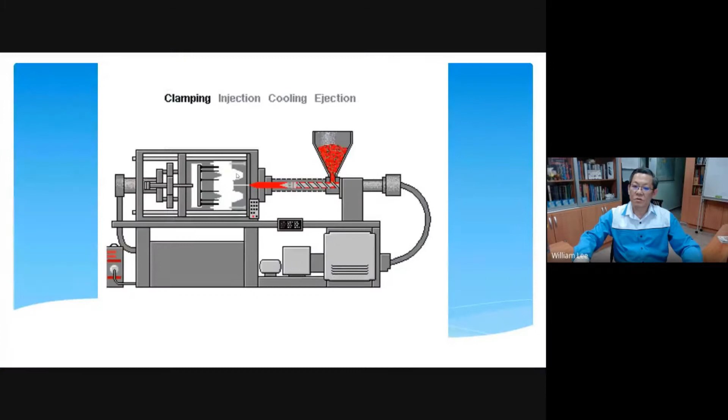I'm sorry about it, because the simulation is supposed to move, and I apologize for that. I don't know what happened, why it doesn't move. Let's hang on a second, perhaps I need to restart my slide again. Just hang on. Hello? Yeah.

Hello, yes, okay. So here you can see there are 4 phases: clamping, followed by injection, then cooling, and then ejection. So as you can see from this injection molding process, the first is clamping. What happens in clamping is the 2 mold halves approach each other. During the injection phase, the plastic pumps in to fill up the cavity. Then the mold undergoes cooling. After that, the parts will be removed by opening the mold. I will explain each of these 4 phases of the injection molding process.

During the clamping phase, you can see the mold is divided into 2 halves. On your right hand side, this is called the fixed half. The fixed half means this mold is attached to the injection side, nearer to the nozzle and the barrel. Whereas on the other half, this is called the movable half. Some people call this the B half, or also know it as the core side.

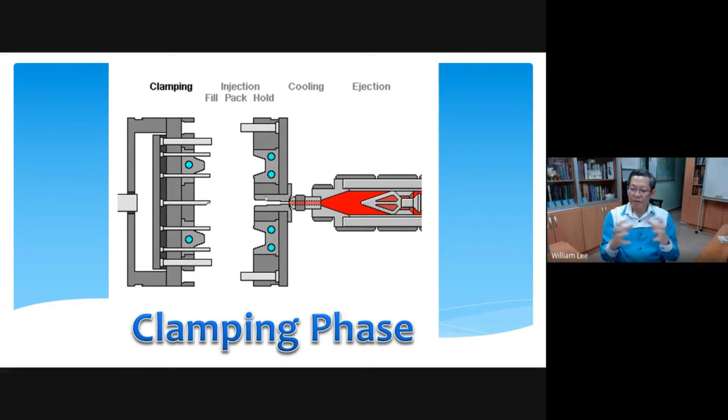The clamping phase is when the mold is closed, then the machine has to build up this clamping force. Clamping force is trying to close the mold, whereas the injection force is trying to open the mold. Initially the mold is empty, so there's no pressure inside, only atmospheric pressure because it's filled with air.

So when you pump in the plastic during the injection phase, you're trying to open up this mold because you build up the internal pressure. Therefore, clamping must build up the force to close the mold. Otherwise, the plastic might zip out, giving you extra material. We call this flashing.

So next is the injection phase. Under the injection phase, you have 3 functions here. Now, of course, you may not have the notes with you, but I want you to write down some keywords because later I'm going to throw you some quiz, and I want to test whether you paid attention or not. So under injection, you have 3 functions here.

One is to fill. Initially the mold is filled up by the plastic. Preferably, we don't want to fill it fully, so you can see we still have some gap. We just fill up loosely. The reason is we want to allow some room space, because that room space is important for the plastic to move during the second function, which is called packing.

The purpose of packing is to fill up the unfilled area from the first function, and another purpose of packing is to compensate for the shrinkage of the plastic. Because right now the plastic is under molten condition, and when it solidifies, it will shrink. So you need to pack to compensate for this shrinkage.

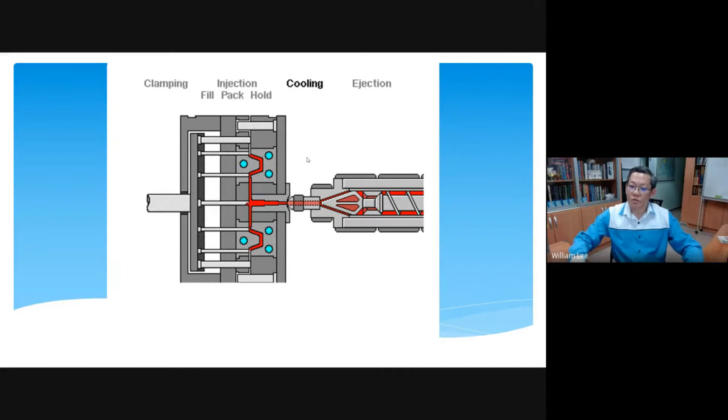Yes, everything okay. Okay, so now we come to the third phase here, and this is the cooling phase. Here you can see what happened is that during the cooling, this indicates a water line. For cooling you can use either water or oil, depending on what temperature you want to apply to your mold.

Okay, so during the cooling phase, it seems nothing happened in the mold system, right?

Remember the screw can move in two motions. One is linear motion, meaning the screw moves backward and forward, providing push to your plastic. At the same time, when it retracts back, the screw will rotate. When it rotates, it builds up another shot ready for the next cycle. We call this plastication, or plasticization.

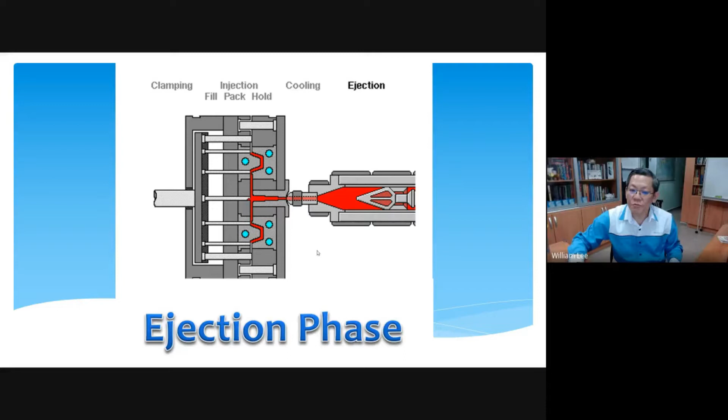Now we enter the ejection phase. Under this phase, the mold will open. When it opens, the parts will be removed and knocked out. I do not know why the simulation doesn't work, let me fix this... okay, ejection phase, now it works, you can see.

So the two mold halves will be separated. Initially, during opening, the mold can move fast, but then later it will slow down. Some people try to improve productivity by adjusting this speed to save a few seconds per cycle. Even if you save just 0.01 seconds per cycle, imagine over 1 million shots, you actually save a lot of time. This is to optimize the molding process.

So notice, after cooling, then you come to ejection. Here you can see the screw has retracted back, building up the next shot, ready for the next cycle. The process keeps repeating, and after these 4 phases, you complete one molding cycle.

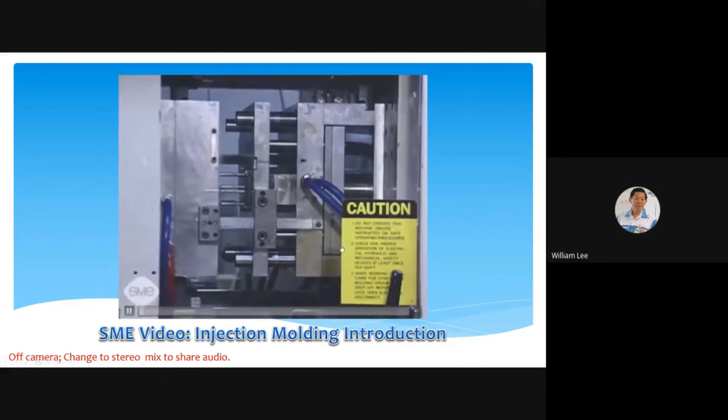Injection molding is the most common method of producing parts out of plastic material. The process involves injecting molten plastic at high pressure into a mold shaped in the form of a part. Once this plastic cools and solidifies, the mold opens and the part is ejected.

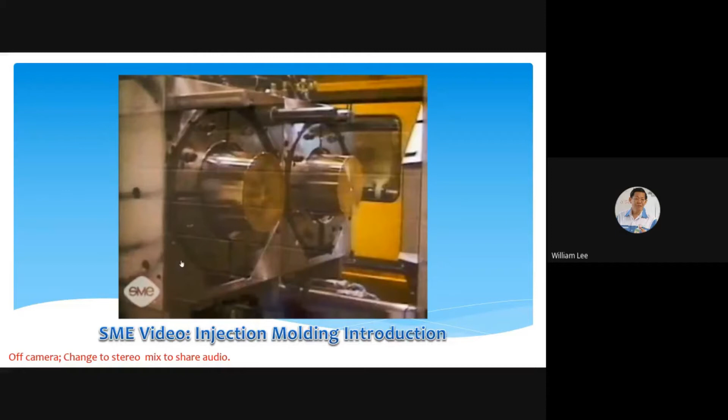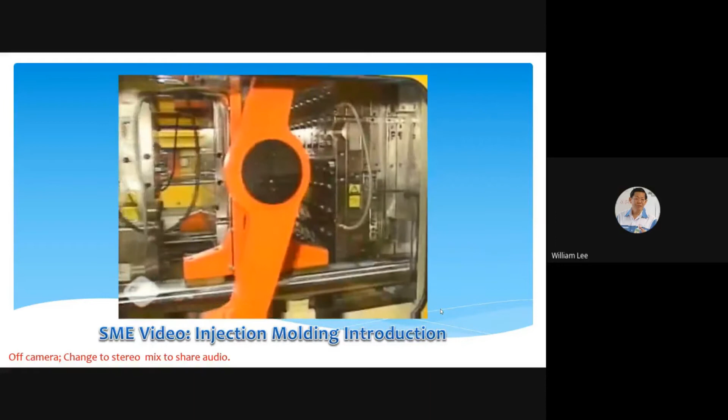Injection molding is an extremely versatile process that can produce parts with holes, springs, threads, hinges, and undercuts in a single operation. Injection molded parts can be simple or complex, and can be solid, foamed, reinforced, or filled. They can be small or large, thick or thin, flexible or rigid. Injection molded parts also lend themselves to endless decorative effects. They can be polished, textured, hot stamped, plated, colored, or clear. No other manufacturing process offers the range of capabilities injection molding provides.

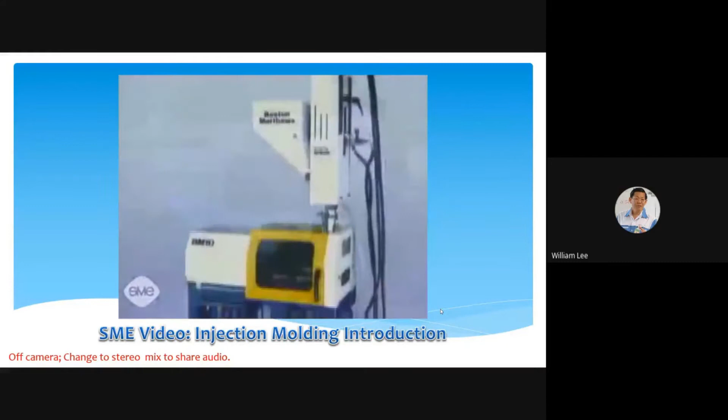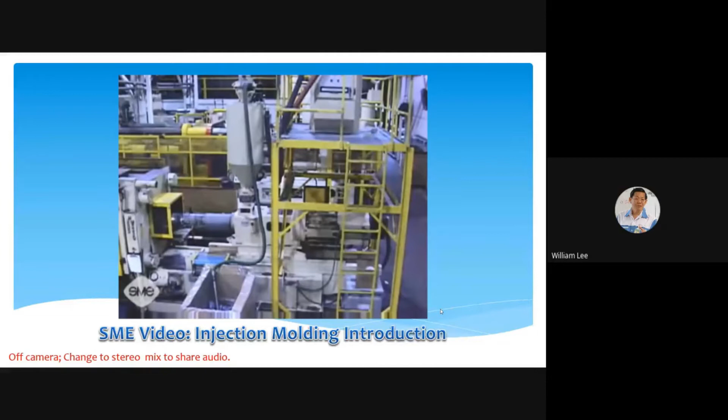Injection molding machines range in size and complexity from desk-size units up to machines the size of a small house. All injection molding machines are a combination of two systems: an injection system and a clamping system. The injection system heats the thermoplastic material to its appropriate viscosity or flowability and then forcefully injects it into the mold. There are two types of injection mechanisms: the reciprocating screw, which is the most common, and the two-stage screw. The main parts of the reciprocating screw injection system are the hopper, a reciprocating screw inside an externally heated injection barrel, a hydraulic motor, and an injection cylinder.

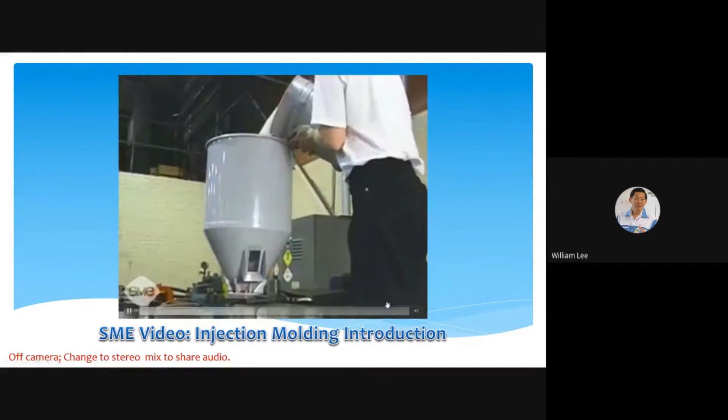Resin material is fed to the injection barrel from the hopper. These hoppers may be filled manually or vacuum-fed automatically, and often have dryers attached to the top to remove moisture from the material. As the resin enters the injection barrel, it is driven forward by the rotation of the screw, which is powered by the hydraulic motor. The resin plasticizes, or melts, as the turning screw drags it towards the nozzle end. This is referred to as drag flow. Drag flow causes the polymer molecules to slide over each other, creating frictional heat, which melts the material.

External heating bands provide additional heat to the injection barrel. They bring the material to its final temperature and compensate for radiation heat loss. The temperature is controlled by 3 thermocouples in the barrel and 1 in the nozzle.

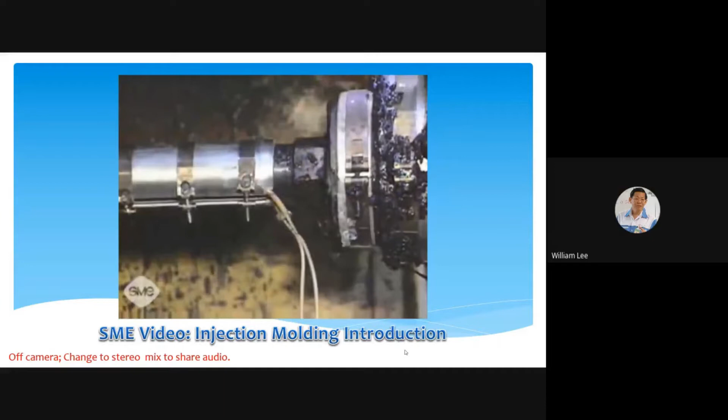The screw consists of 3 zones. The first zone, half of the screw, is called the feed zone. It has a constant flight depth, which forces the material together and rids it of air. The second zone, called the melt zone, has a decreasing flight depth, which reduces the plastic volume, causing the plastic molecules to rub harder against each other, plasticizing the material.

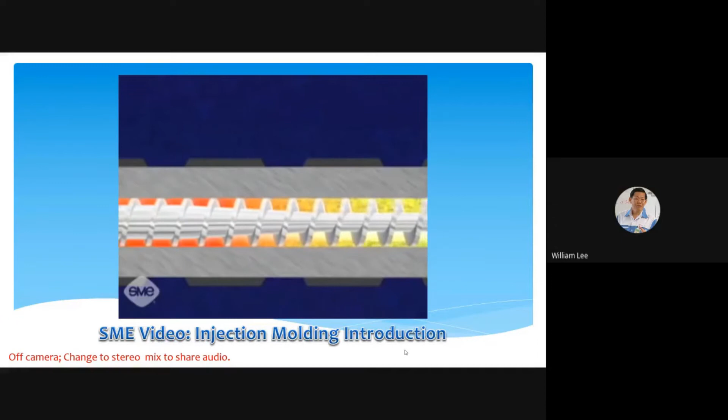The melt zone leads to the third, or metering zone. The metering zone has a constant flight depth much smaller than that of the feed zone. This section acts as a pump. The tip of the screw has a one-way valve which lets material flow only towards the nozzle end.

The force of the plasticized material pushes the screw back as it turns, building a chamber of plastic in front of the screw. When enough material for the injection shot is melted, the screw stops and pulls back to decompress.

For injecting the material, the one-way valve closes as the screw is hydraulically pushed forward by the injection cylinder. This sends the molten material through the injection unit's nozzle and into the injection mold.

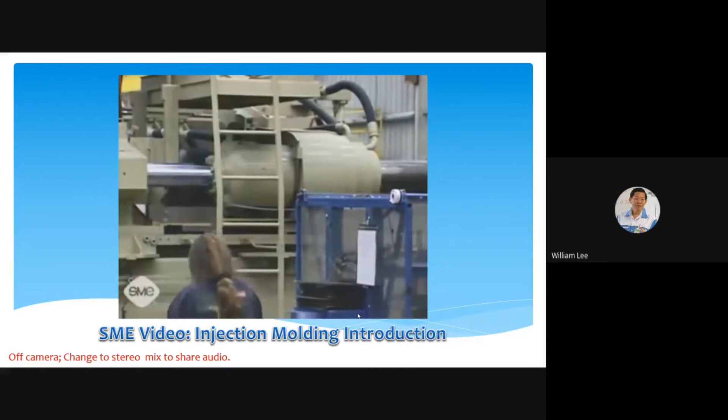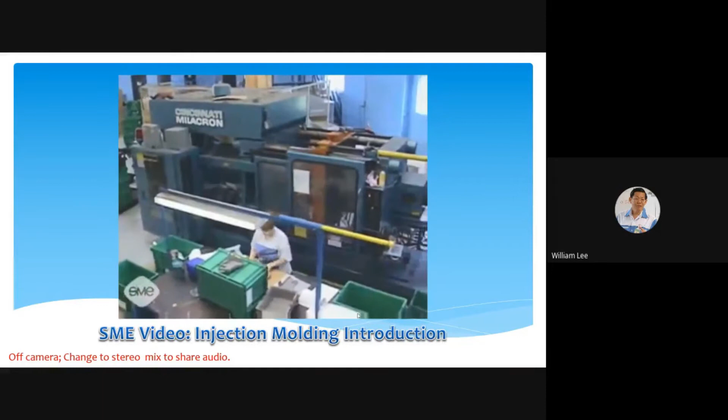At the time of injection, the material's temperature ranges from approximately 320 to 600 degrees Fahrenheit, or 160 to 320 degrees Celsius. Once the plastic solidifies, no more pressure can be exerted upon it in the mold. The reciprocating screw then begins to rotate again, melting material for the next shot.

Okay, let me turn back to my video, my camera, and also my microphone.

I hope that you have enjoyed the show just now, and that it explained to you the overall view of the injection molding cycle and how the injection system works, and how this mold is operating inside the machine.

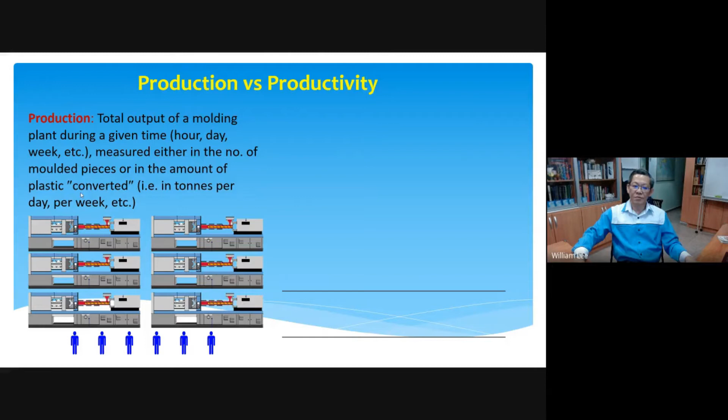For example, from this plant here you can produce 3,000 parts per 8-hour shift. Let's say one shift you run 8 hours. If you're running non-stop for 24 hours, meaning you just times 3, you get 9,000 parts per day. If you base it on per shift of 8 hours, you produce 3,000 parts.

Okay, and what about productivity? Productivity is defined as the total output of a molding plant per floor area and the number of operators required. As a rule, the better the machine you use, the molds, the methods you use to operate the plant as a whole, and if you use fewer operators, the higher is called the

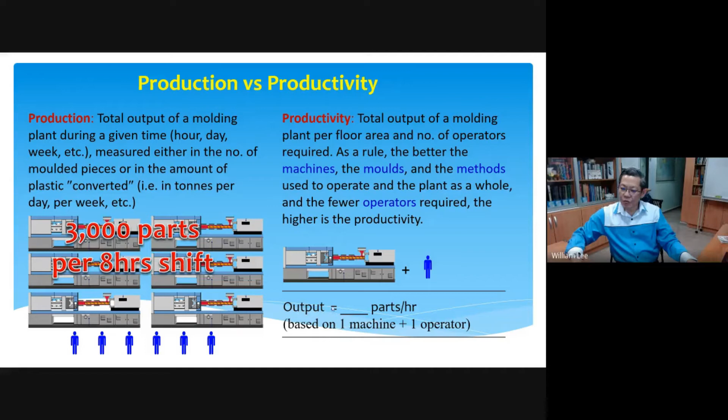productivity. So for example, here you have one machine, one operator, and here we say the output is, let's say, 120 parts per hour. So that means based on one machine, one operator, you can produce 120 parts.

Now here, if you compare the productivity from this plant here, obviously you have to compare fairly. So here you have 6 machines, 6 operators. Here I only have 1 machine, 1 operator. So how do you convert? If you base it on 1 machine, 1 operator, how many parts per hour? I want you to type in again, try to work it out. If you have found the answer, type in the answer.

So what is the productivity from this plant here? How do you work out? Remember, based on 1 machine, 1 operator, we have to compare them equally. You know that you have 6 machines here, 6 pairs actually, 1 machine, 1 operator, you have 6 pairs. Here only I have 1 pair, okay?

Yes, we have Huang coming in and Hao coming in, 62.5 parts per hour. How do you get 62.5 parts? It's 3,000 divided by 6 first, okay? 3,000 divided by 6, and then divided by 8 hours, because here I'm asking about the unit, that's correct.

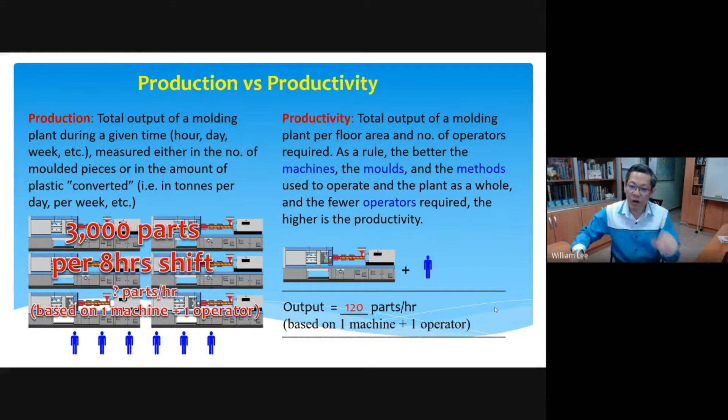So let me show you one example here. Again, this is plant A. I have 4 machines and you're using 4 single cavity. Single cavity means that every 1 shot, you only produce 1 part. And then you have 4 operators. In this case, I rated here based on the earlier output, 120 parts per hour per operator.

So therefore, in this case, the output, now we have 4 machines, 4 pairs already. So therefore, based on 120 parts, 120 times 4, you got 480 parts per hour.

Do you know how to work out? If you already know the unit here, 120 parts from the earlier slide, so I have 4 pairs here, right? So 1 pair contributes 120 parts per hour. So you have 4 persons here, 4 machines, 4 more, so I have 480. Okay, so I hope you understand how to work out.

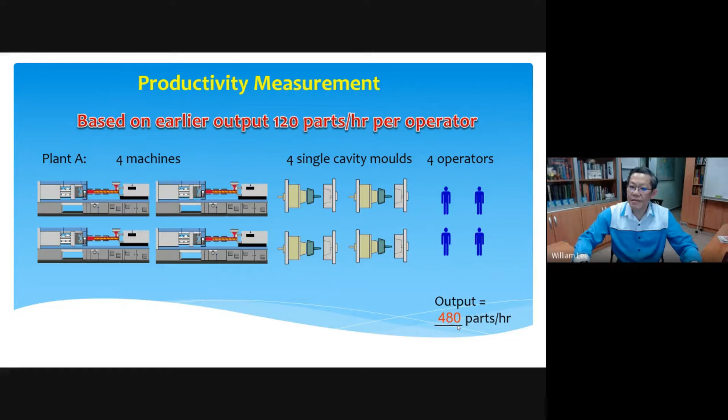Now I compare with another plant B here. Here I have 1 machine only, and I have 4 cavity mold. 4 cavity here, you can see 1, 2, 3, 4. 4 cavity mold meaning that every 1 cycle, then you can make 4 parts. And here I engage 0 operators because I use a fully automatic with the help from the robot here. Let's say if the output is still the same, but I'm only using 1 machine and there's no operator and only 1 mold.

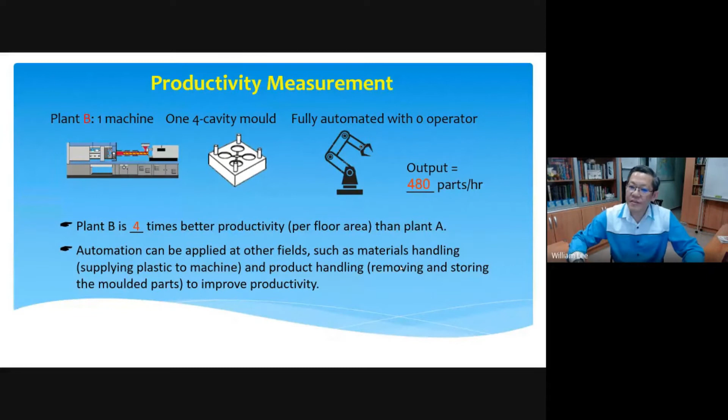All right, next I want to show you another example here. Now that you know the productivity from the earlier example, is plant B, where you can achieve 4 times better than plant A. So assuming here the time allocated for mold is 40 hours. That means from one machine, I give you 40 hours to run this order. So when you want to install the mold, let's say it takes 6 hours.

And installation includes, first you have to mount the mold in the machine, then you connect all the pipelines, and then you heat up the mold. So you have to warm it, and then you run it. After you run a few shots, warm up, then you can run it on the full cycle fully automatically. And this also includes dismantle. After you finish the order, you still need to take out, so you need to also disconnect and remove the mold and get the machine ready.

So these are all included under this 6 hours here. That means to install and to unload, it takes 6 hours. So that means the total hours allocated is only 40 hours, and 6 hours is actually non-productive. So therefore, assuming that all pieces are good, no rejects acceptable, how do you calculate the efficiency?

So here you can see 40 hours minus 6 hours over 40 hours. This is a total allocated time, and you have wasted 6 hours for the non-productive activity. So 40 minus 6 divided by 40 hours, times 100 if you want to convert into percentage. Can someone work out for me? What is this? 85, yep very good. Nicholas, very fast, 85% efficiency here.

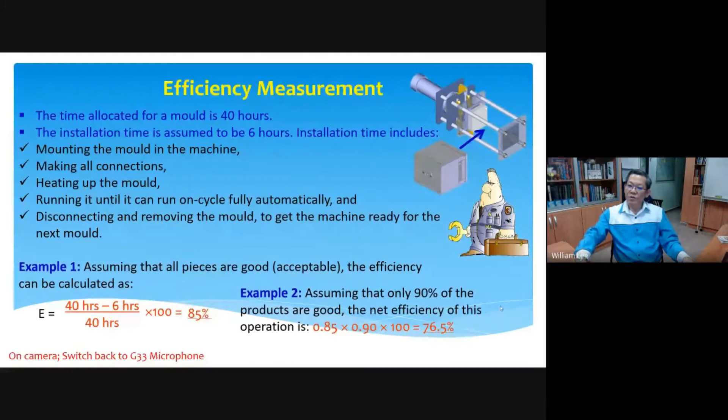76.5% efficiency. So again, efficiency can also help to improve productivity. How? By reducing the reject. If you have more reject, that means you end up with a lower value from 90%. Let's say if you have 30% reject, you only have 70%. So multiplying with the lower value, you will end up with an even lower percentage of efficiency. So another way for you to help the employer is to reduce the reject. But then you have to understand what caused the reject. You still need to go back to the basics to solve the problem.

So you know that the bosses don't want to waste their money, right? When they invest in you, they would like to ask from you - what are they looking at from this fresh graduate? And what can you offer to the new bosses? So here I have listed 3 skill sets, and I would like you to check which skill set in terms of priority is important for you to secure an employment opportunity. Will it be personal skill, working experience, or education qualification?

This is my second quiz. I've given you this second quiz here where you need to find out - don't treat it as a test, don't worry, it's just a survey only. I want you to rank them - which one is more important in order of priority? For example, 1 means this is more important, second important, or third important. So I have 3 skill sets here, and I'll give you the 1, 2, 3, 4, 5, 6 combination.

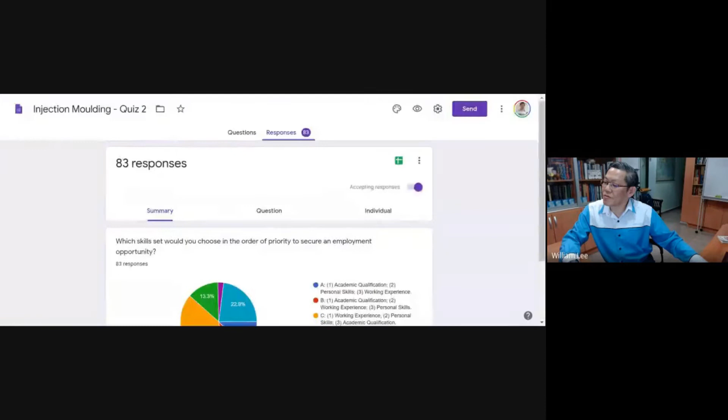So now it's between C and F. Look at the trend now - it seems like a lot of people prefer C. So majority of you prefer C, and some believe the second one is B. Okay, I can see the trend now already. So it looks like you prefer number C - work experience is ranked number 1. All right, that's fair enough.

Okay, let's go back to this again. It's very subjective. I can see that a lot of you prefer personal skill, which is ranked number 1. So you prefer F, and the second one is C, working experience.

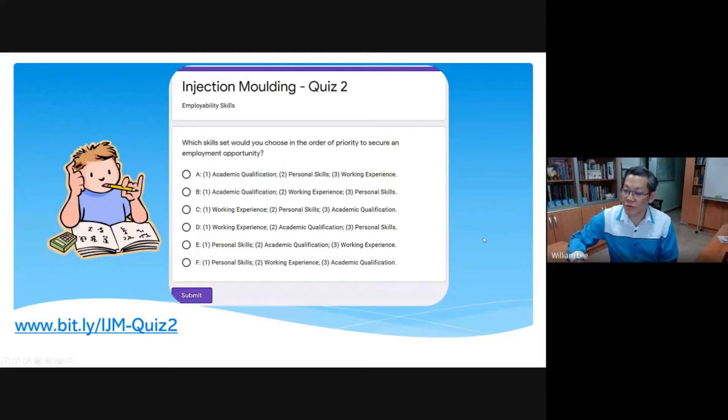Now, what I can tell you is the criteria used by today's HR practitioners when they first interview a fresh graduate - what do they care about? Don't forget that if you are comparing with those who are applying for the same job, there are a lot of people who also have the same academic qualification. But I can share with you some of my survey findings from when I deal with these people, and they told me this is the ranking. Let me check.

So this is the criteria used. First they will check your character, then they will test your communication skill—these two are under personal skill. Then they will ask about working knowledge and check whether you have job experience—this is actually checking whether you are work ready. Only the final one, they check your education qualification. This is according to some managers in the industry who told me, so this is for your reference.

Now, what I can see from this survey is what the employer will prefer. Some of you say the working knowledge can be a priority, but what if you are without the working knowledge, and what if you never worked before? Therefore the personal skill is actually ranked first, because they find that if you have the right attitude, you gain the opportunity to work and then to move on. So this is how they rank it.

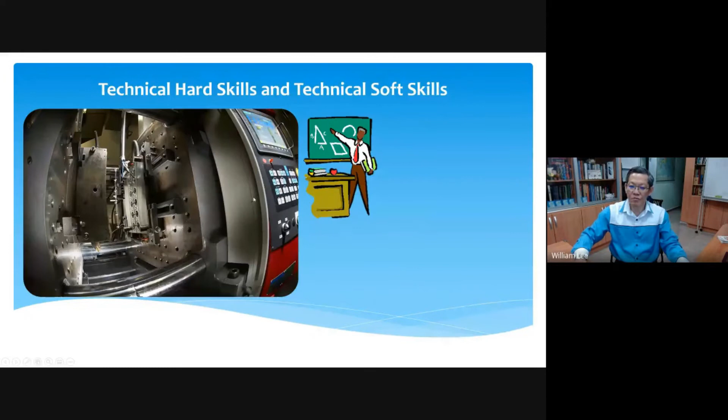In this case, it involves the use of the machine—you must know how to operate the machine, operate the mold, and maybe use some sensors for production. Also, if you have some defect, for example an unbalanced cavity fill, maybe you have to learn how to use the insert, or in the future, learn some digital skill, like how to command the robot to perform a specific task.

These are under the technical hard skill, okay? By using this machinery and tools, it allows you to start to produce some part. But this is only a shape, as I said, to produce a part. The part looks like the shape of the product. But whether this product is reliable, is durable, can last longer or not - this talks about the performance of your part.

In this case, technical soft skill is where they teach the science and insight on how to make a good part, right? So this part must achieve the specification set by the user, by the customer. And this is the difference between soft skill and hard skill.

So in short, we can say that soft skill is learning the theoretical side of this technical learning, right? Theory is, of course - some people say that learning the theory might not be applicable, but it's good to study theory. The only thing is that you have to focus. This theory must be applicable to the job that you are using. Here we teach the science and the insight.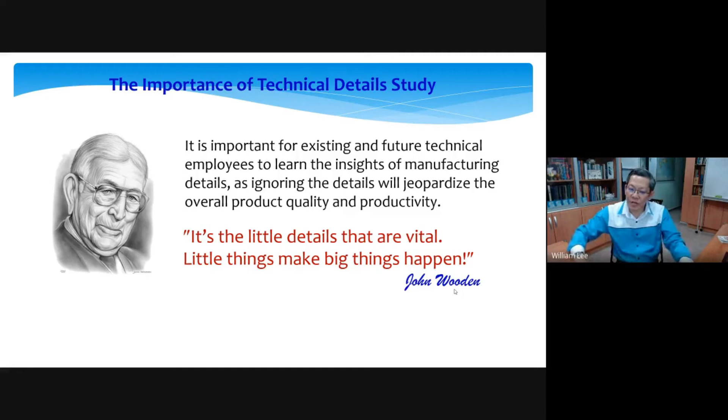Usually when you apply for a job, you may be assigned to look after a certain specific task. But I find that a lot of other people tend to ignore other factors which they feel, for example, like the details of the design, details of material, details of the mold making. They thought this is not their scope of duty, which I find is wrong, because to make a quality part depends on many manufacturing variables, which I will explain to you in a short while.

So I believe, therefore, manufacturing should be regarded as a science. It is not magic. You can see that magic means - this is our famous cartoon to depict our Raja Bomoh. And this differentiates what is the traditional worker and the scientific worker. So if manufacturing is a science, we call this scientific manufacturing. We should treat it as a science.

For scientific manufacturing, you require scientific workers, right? The difference between the two is scientific workers are always based on fact and data. They behave like a doctor. A doctor always studies the prior history, based on data. They will inspect you before they give you the solution - they give you the medical solution.

So how do you build up this knowledge? The technical soft skill is based on scientific and logical reasoning. It will be useful to complement the hard skill practice, not only by using the hard skill.

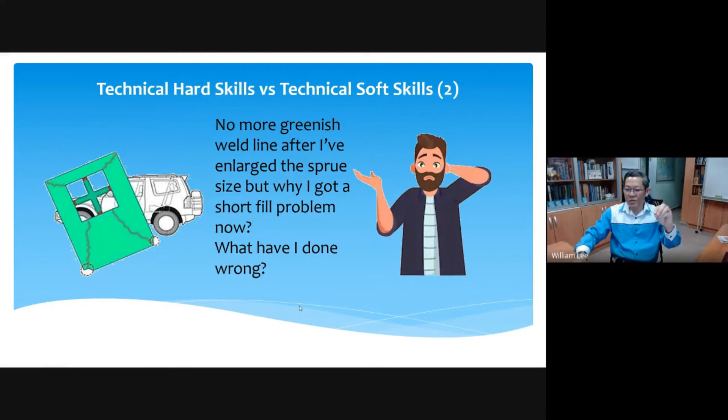Because if you fill the parts slowly, that means the temperature will cool down. When you cool down the temperature, by the time the two melt streams meet each other, you can see the visible weld line.

So that is to say, you have to again understand the inside of this process in order to choose the right parameters, to choose the right factors. Otherwise some of these results won't give you a logical reason.

So my advice is you have to work smart and not harder in order to deserve a higher pay.

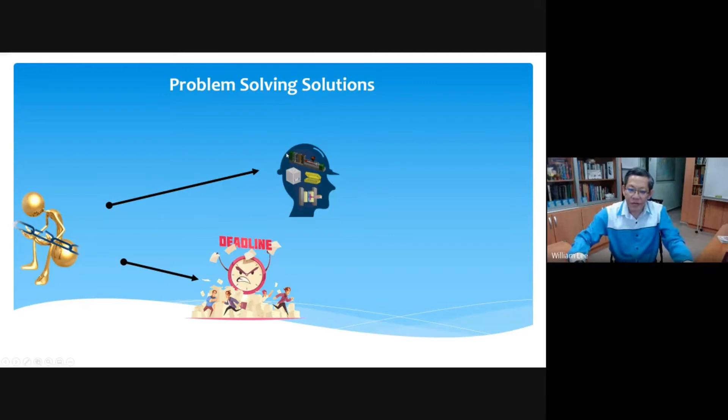When you have this problem, it relies on your skill to solve it. To me, solving the problem has two ways. One is to fix the problem, but this is just a temporary measure. To fix it means you have to do it fast.

Why do you need to do it fast? Because you have a deadline to make. This is usually what happens in the factory, in existing manufacturing. From my observation, the existing manufacturing culture is one where people always entertain this reject.

Then you have to rework, and replace them in time. This is just fixing it temporarily, which is not sustainable to me, because the problem happens again. If you want to solve it forever, you have to change this 3R. What is 3R? Reject, rework, replace.

Not Ronaldo or Robinho, but reject, rework, replace. The new 3R should be: you have to conduct research, review the process, and maybe re-engineer it. So to solve the problem, you need to solve it patiently, following this step.

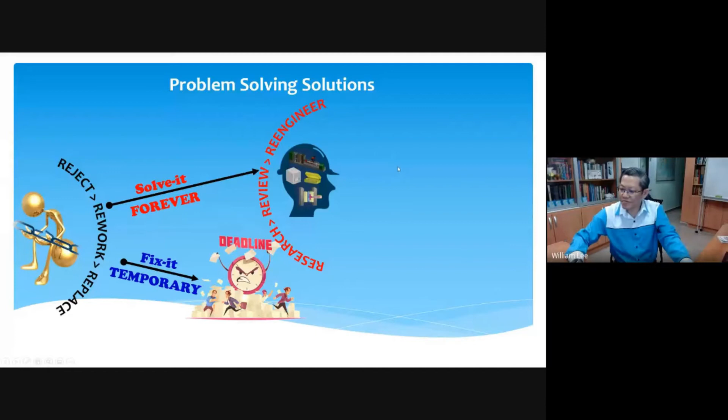You have to analyze carefully, objectively, and apply science as common sense, logically and obviously. This way of solving the problem, you can remove the problem forever, but it takes a longer time. In order to conduct the research, you must have strong fundamental knowledge, and this is where learning this technical soft skill by studying the science and insights is very important.

Employers always prefer to look for the troubleshooter. So you need to equip yourself with the necessary skills and knowledge to become very resourceful. Chasing a degree or diploma is not enough, you need to add value by attending courses and doing extra reading. That will add value to your academic qualification, secure you the job, help you stay in the job, and help you move up to the top. That's my advice.

Okay, now quiz number 3. Let's type in quiz number 3. The first step of an effective troubleshooting strategy that a smart worker should apply is what?

Please check at your checkbox so you can type in your answer. What do you think is the first step for effectively solving a manufacturing problem? In troubleshooting strategy, you must set the right strategy to become a smart worker. Let's see whether you have the right answer. This is quiz number 3.

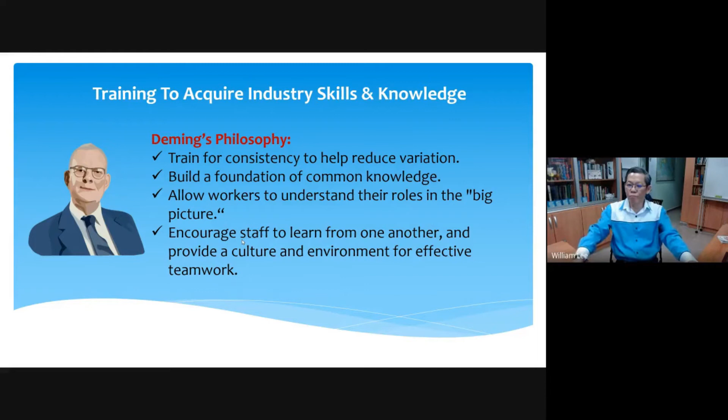So therefore, to give you 3 criteria for a good mentor: a good mentor is qualified to train in terms of experience, skill, and knowledge.

He must be willing to train, and he must know how to train. There are some people who are qualified but do not know how to train, which is also not effective. And there are some who are qualified but not willing to train - they don't want to share their knowledge and experience with you, so you cannot acquire this information. These are all interactive. So a good mentor should meet these 3 criteria: qualified to train, willing to train, and know how to train.

There are many training providers you will encounter in the industry. Employers refer to the HRDF - you can log onto their website where many training providers are registered with the HRDF, which stands for Human Resource Development Fund. There is also another professional body for engineers and technologists, from the Malaysia Board of Technologists.

You can log into their website to find some training providers and their training courses. My company is actually registered with the MBOT and with the HRDF, and you can also log on to find us.

To date, my company has developed more than 150 topics in precision engineering, covering mold and die, injection molding - I have 40 topics, and each topic takes about 4 hours - metal stamping, semicon, die casting, forging, and material engineering.

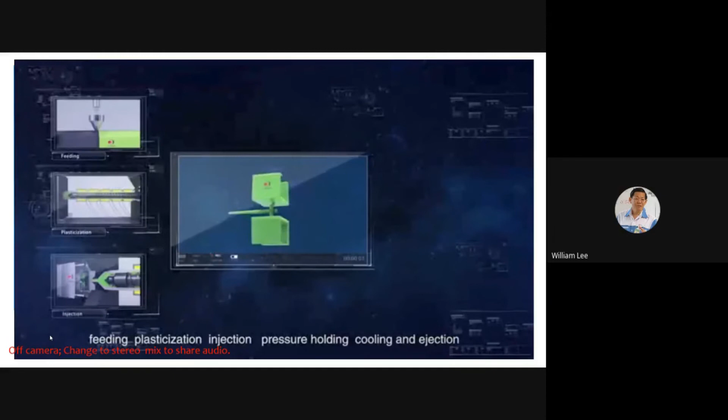Injection molding is the primary molding method for thermoplastic materials. The process usually includes the following steps: feeding, plasticization, injection, pressure holding, cooling and ejection.

Plastic pellets are fed into the injection hopper and then fall into the barrel. Inside the barrel, the rotating screw transports the pellets forward. The heating bands wrapping around the barrel warm up the plastic pellets.

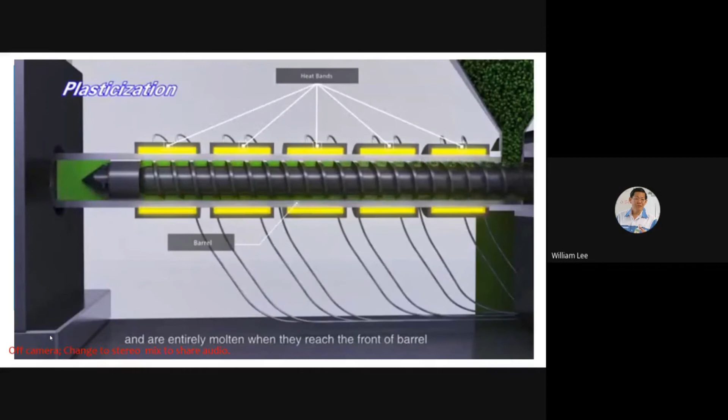As the pellets are moved forward by the rotating screw, they are gradually melted and are entirely molten when they reach the front of the barrel. Once enough plastic is in front of the screw, the screw injects the molten plastic into the mold cavity through the sprue and runner system of the mold.

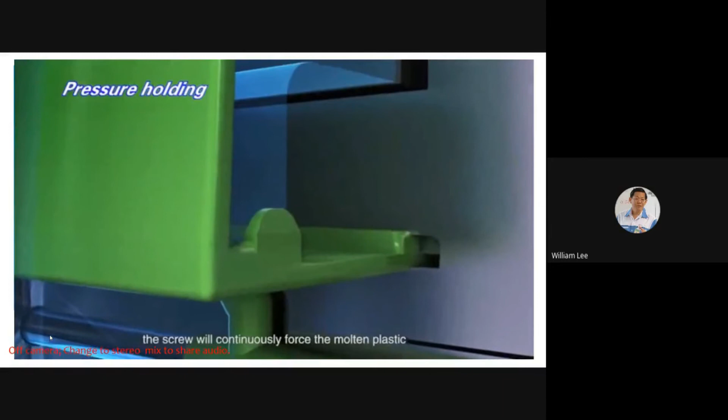When the molten plastic is shrinking inside the mold due to cooling, the screw will continuously force plastic into the mold for replenishment to ensure that a complete structural product is produced.

The mold temperature controller delivers water or oil into the cooling system to maintain the mold temperature as specified. The molten plastic cools down and then solidifies in less than a minute.

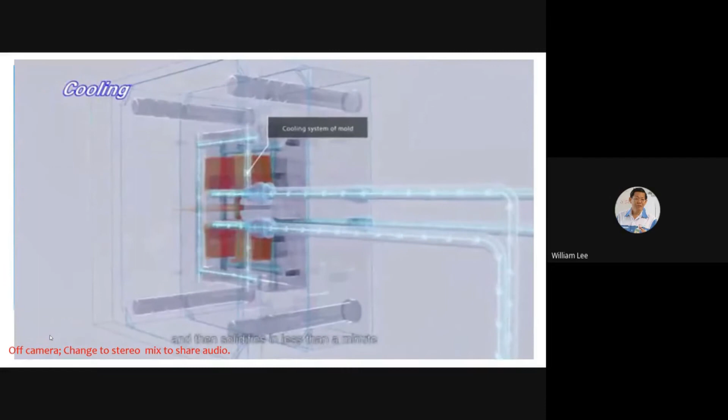The mold opens and the ejector rod moves the ejector pins forward. The part and runner fall and are captured in the bin. After that, the whole process repeats over and over to produce small plastic products.

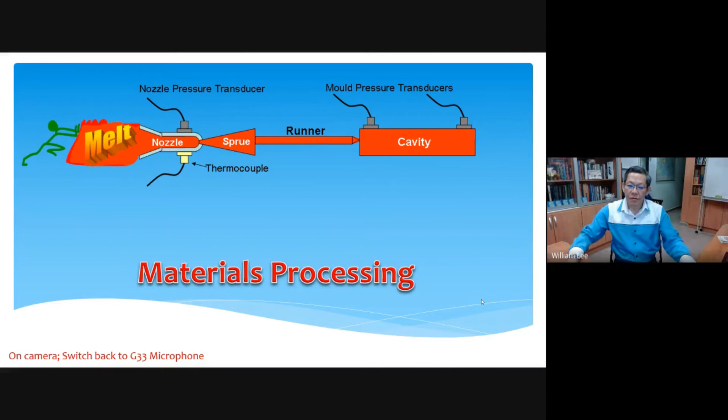Okay, I'm back now. So now in summary, therefore, the injection molding, what happened is that the process actually involves heating the plastic. All right.

So you heat the plastic in order to melt it down, and then you have to flow the plastic. When you flow through the nozzle, the sprue, the runner, through the gate, and inside the cavity, then you pressurize it, right? And then after that, you cool it. So that's it. All right.

So what happens to the material is that it will experience heating, then flowing, then being packed, being pressurized, and then cooling down to solidify. Okay.

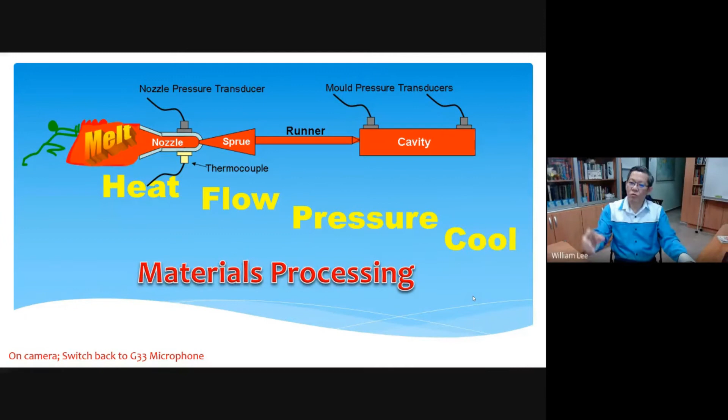So it is very important that the modern and knowledgeable molder adopts the mindset of processing from the material or plastic point of view rather than the machine-focused approach.

Now, what is the difference? Machine-focused approach means that you set the data into the machine. You command the machine to heat up your plastic. So from the material's point of view, whether this heating is totally transferred to the material is the question.

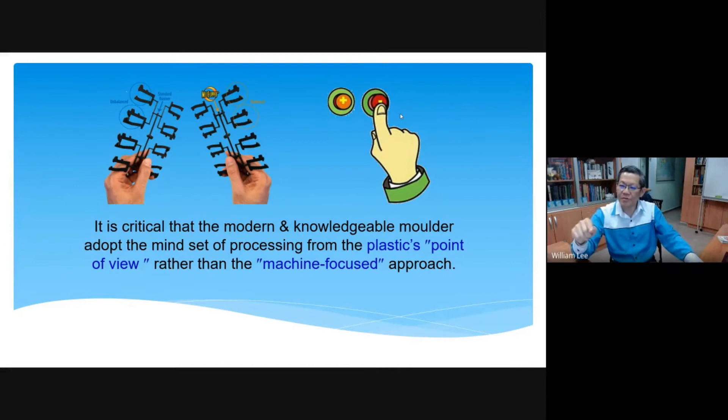So you set the barrel temperature. Let's say you set barrel temperature at 200 degrees Celsius, and you have to ask yourself whether your material is actually also achieving 200 degrees Celsius.

All right, and what is important? Is it more important for the machine to heat up to 200, or for your material to receive the actual temperature that is required, right?

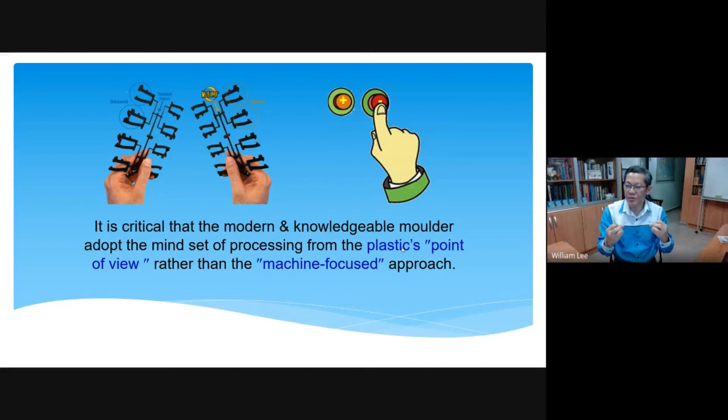So you have to understand machine focus means that it's all the data that you key in, but whether the material receives this is the variable here - these are all output data. Okay. So therefore, material know-how is very important for you to conduct effective molding.

Okay, so there are 4 characteristics of the plastic. The first one is plastic temperature. Okay, so now I talk about plastic temperature, not the barrel temperature.

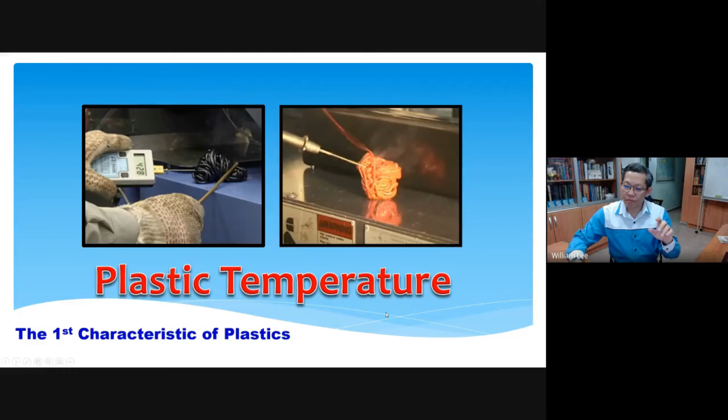You know that in your injection machine, you have a barrel, right? Where you key in all this temperature, which is heated up by the heater bands, which are wrapping around this injection machine barrel. So here you can see that we conduct a check.

And this is, to me, more important, right? Because I want to make sure whether this plastic has received the desired temperature, right? So you have to imagine, sometimes when you key in 200, your plastic could be higher heat or could be lower heat. In order to assure that, you must measure this output information, right?

Because after all, in the end of the day, what you are trying to process is a material. The material must receive the required specification, right? So plastic temperature is one of the important characteristics here.

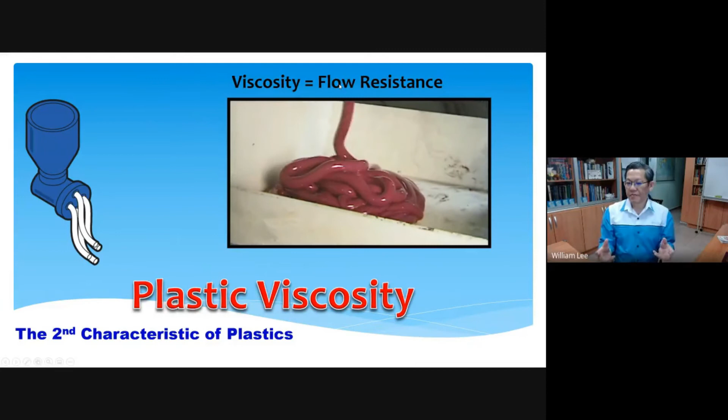And the second one is plastic viscosity. What is plastic viscosity? Viscosity means flow resistance. So if viscosity is high, the resistance is high, and therefore they will flow slower. If viscosity is low, they can flow faster. Flow faster or slower is very important because it's a matter of how plastic fills in and packs, because this involves the flow of the plastic.

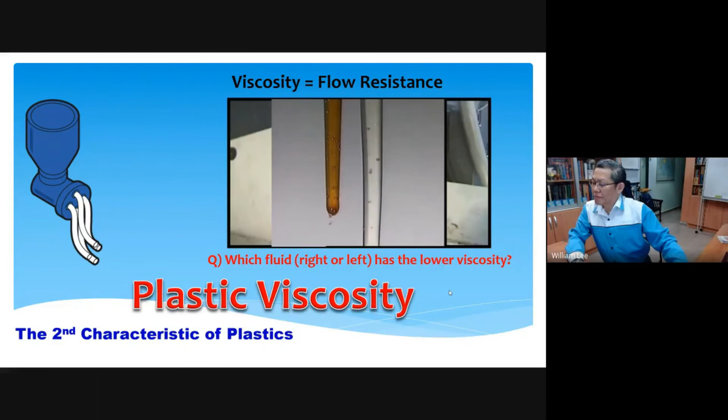So here I can show you that, with this picture. Which fluid, I have two fluids here, which one has the lower viscosity? Can somebody type for me in the chat box? Yep, that's right, on the right hand.

Remember I said viscosity is a flow resistance. So therefore, if they have a lower viscosity, it means that they flow faster. So the right hand column, the right hand fluid, is having the lower viscosity.

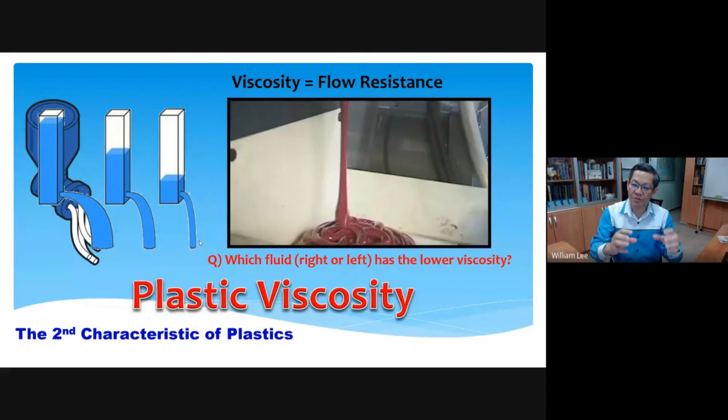Now, the key here is that when the viscosity is changing, you will not be able to maintain the same flow rate. Here is the picture that shows you this. Initially you have a high flow rate, but then gradually the flow rate becomes lesser and lesser, and this is inconsistent. When you have an inconsistent flow rate, you will not be able to get a consistent molding result. So plastic viscosity involves the study of the rheology of the plastic.

Rheology is the science of fluid flow. This involves the study of fluid flow, and we call this rheology. So this itself is another discipline of the material.

The third characteristic is about plastic pressure. Since I mentioned that you need to also pack the material, what is pressure? Pressure is resistance to flow, meaning that when the plastic doesn't move, it will build up internal pressure.

And for this reason, one of the functions is after you fill, you squeeze more material, you pack the material. You need to introduce pressure to the plastic because when plastic changes from liquid to solid, it can shrink as much as 20 to 25%. If it shrinks more, you get a smaller dimension, so you need to provide this pressure.

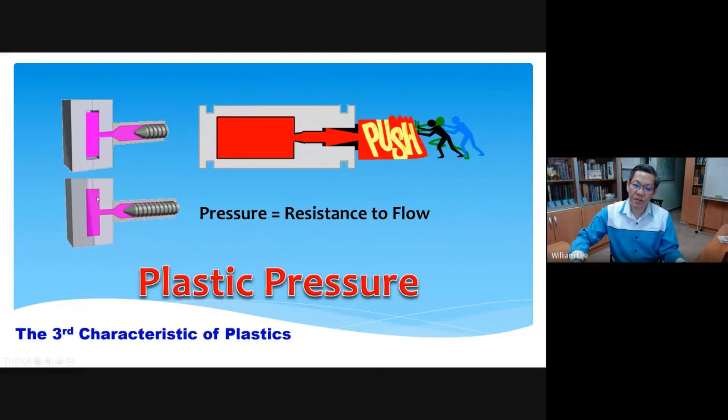So here you can see that when you push them in, initially you fill up, and then you have to pack the material with high enough pressure. Otherwise the plastic will shrink, and you will not get the desired dimension, because it can affect the part dimension. And if you do not pack them sufficiently, they cannot copy the surface of the mold, so it won't give you the right result.

And the last one is plastic cooling. Plastic cooling can also affect the productivity of the molding cycle, because when you look at one molding cycle, time is spent on things like mold opening. I have a chart here to show you the time occupied by the various functions in the molding cycle: mold open, then the part is knocked out, then the mold closes again, then you fill up, and then you pack.

Fill is very fast, and then you pack and hold for some time, and finally there is cooling. You can see that most of the time, cooling will occupy more than 50%.

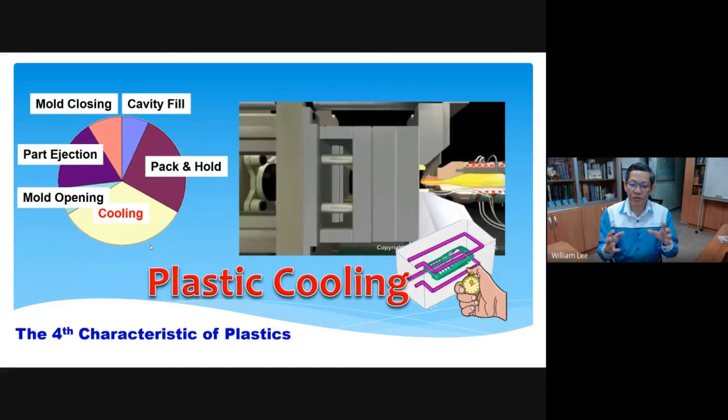So if you want to improve productivity, having an effective cooling system is one way to do it. Here you can see we have this water pipe, and this is the cavity where you fill up the plastic, and this is where it goes through the cooling phase in the molding cycle.

In the future, Jack Ma said that the future is data. So I mentioned to you what data is important. Is it the input data or output data? By matching this important data, I'm sure that you can produce the same part with the same quality. So output data is actually more important than input data. Output data are those results that you achieve. Input data are those that you key in.

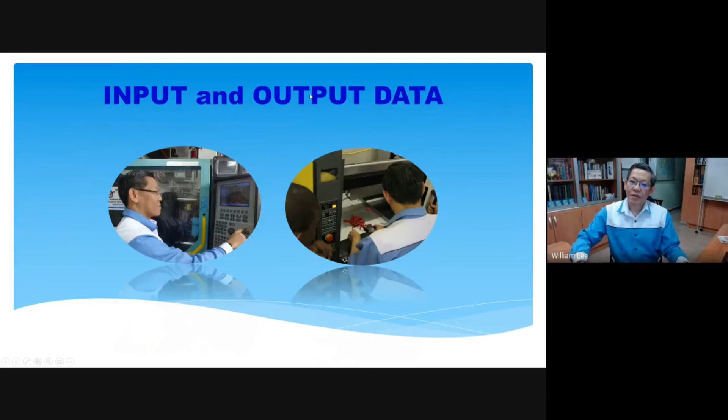So here we have input and output. This is to say that your machine data, the data you key in, is not the same as the process data. When you want to run the process, you want to make sure that your material receives this information - the heating rate, flow rate, pressure, and cooling rate.

Not the machine data. This is to say that because you key in 200 degrees C, your plastic may get 200 or even lower or higher. We do not know unless you measure to confirm it. But another machine may need a higher temperature input to get the same output data. So matching this data is very important.

So output data is more important than the input data. If you can match the output data, not the input data, I'm sure you can do consistent molding regardless of where the machine is located, or what brand of machine. Whether you use brand A or brand B, as long as the plastic receives the same temperature, same flow rate, same pressure, and same cooling rate, you can get the same result.

Okay, now we go into quiz number 4. Can Mr. Lim help me type in this link again for them to find the answer? I want to ask you, which of the following are machine independent parameters? Here you have output data and input data. Remember, output data is independent of the machine - that means this data does not depend on what machine you use. Okay, let me see.

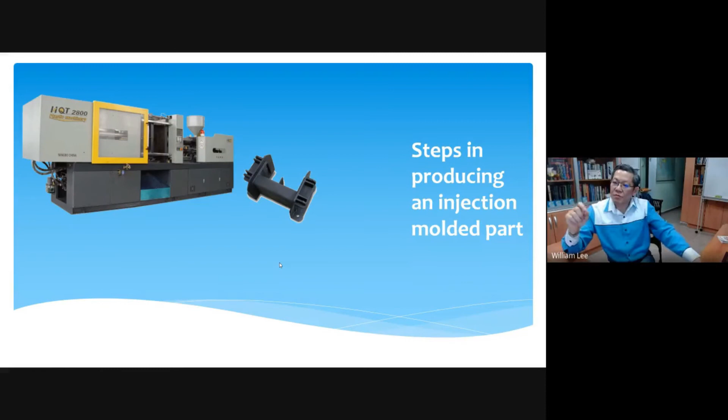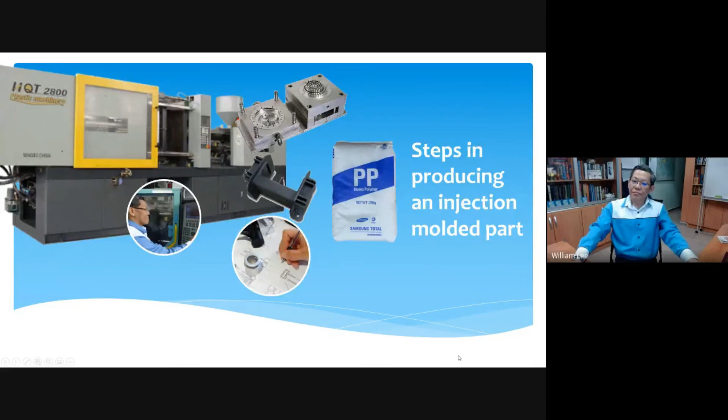Now to make an injection molded part, there are many activities involved. One activity, of course, you always have to start from the design - the product design. You must design a product that will be sellable. Then you need to specify the material, fabricate a mold, select a machine, and finally key in all the parameters - the predetermined set of parameters to command the machine to do the job. So the 5 conditions - and I realized whether you're in injection molding, die casting, extrusion, or semiconductors - because I teach not only injection molding, I also teach other processes.

Regardless of the process, the quality and productivity issue will not run away from these 5 M factors. What are the 5 M?

The first M is product design. You must have a product design first, but the design must be manufacturable, meaning it must be able to manufacture out with the least reject, faster cycle time, and better yield. That is the function of the design. Many designers, when they design something, only talk about the functionality of the part. But that is only half of the job.

The other half of the job, you must make sure they are manufacturable. If you're using the molding process, we can call this a moldable design. It means the design allows you to mold out in a faster cycle time, with less material, and less reject.

Then we have material, the second M, which is about choosing the right material and understanding it. Mold performance is the third M. Machine selection is the fourth M, you must select the proper machine. And finally, processing method. This is why I have invented this concept called the 5M concept learning.

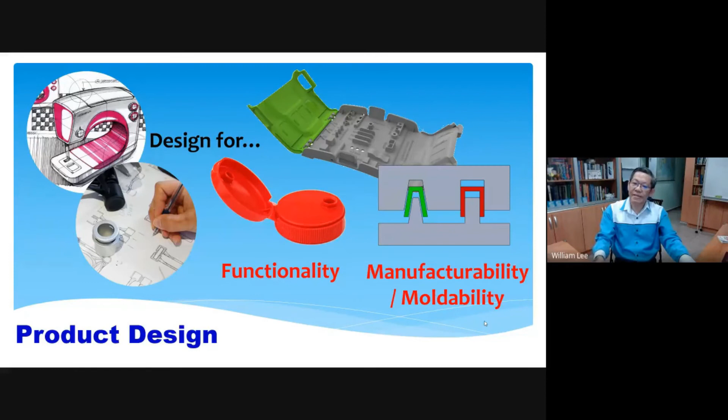But the other half is you must make sure they have manufacturability or moldability, if you want to use molding to manufacture it out. That means the ability to mold out with less material, less reject, and less cycle time.

From this design factor, I realized that the main culprit is because the basic design guideline is never followed, and that makes the molding process very difficult to achieve the quality and productivity.

Some of the design guides, such as the rib design, you can see this rib. I have a sample here. This is called the rib.

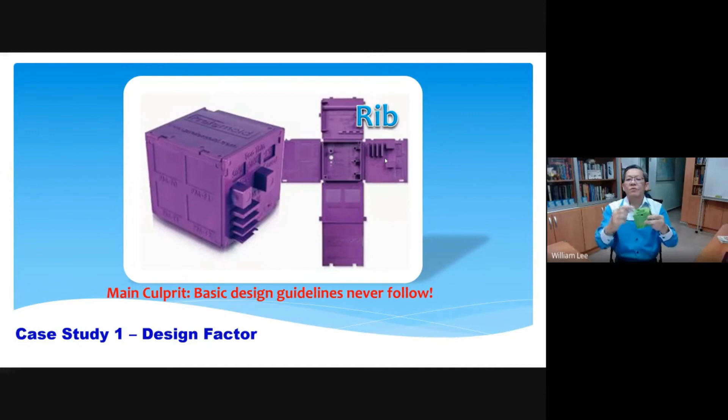Then you have the hole design. Some of the considerations for the hole are: where is the location of the hole, how big is the hole, and the hole spacing, and then wall thickness.

Boss, not the boss that you are looking for a job, but these are the bosses, where they are meant for fastening purposes.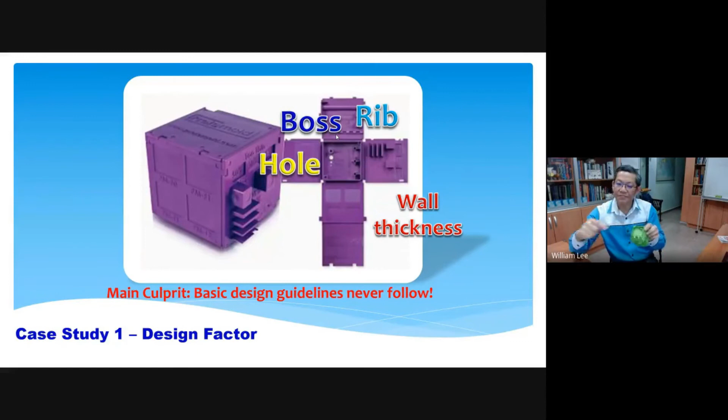And then we have surface finish, and even the letterings or logo, plus also the draft angle. These are the things that you should study, because design is one important factor to improve the molding quality and productivity.

The second is material. The main culprit here is the wrong choice of material. When you select the material, you must know what types of material there are. There are many types of plastic in the market, plus some additives, and also the properties.

How they are being used in the actual application, whether you need corrosion resistance, heat resistance, better strength to resist fatigue, and also the molding characteristics that involve rheology, which is the fluid flow study of this plastic.

So usually wrong choice of material involves either the material properties or the poor quality that you have selected. That is the main culprit from this second M factor.

In this case, I have an example where the molder uses a soft surface, easy flow acrylic, meaning PMMA, for this thin wall concave lens. With this thin wall lens, since it's very thin, you need to select a material which is easy to flow.

Because this is exposed to outside air and atmosphere, the lens is expected to be rubbed in a dusty environment. So at the same time, you need wear-resistant plastic, and also a plastic which is easy to flow, in order to fulfill the moldability, the production, and also meet the service performance requirement.

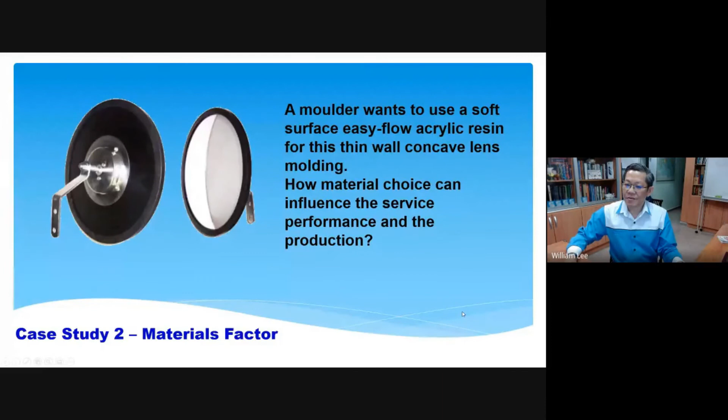In terms of the mold, how do you measure the mold performance? You compare whether this mold can produce the part reliably, whether it gives good product quality, and you compare the mold cost - when you convert it into part cost, how much is the mold cost, and also the life expectancy. In short, you measure the mold performance in terms of mold function and mold reliability.

From this factor, the main culprit is usually improper mold design and poor reliability. Poor reliability means it doesn't last longer. Sometimes a new mold may have no problem, but after using it for some time it becomes an old mold, then issues start to occur - you have many rejected parts because of the reliability issue.

So now, first of all, what is the mold function? The mold function involves shaping the part. The mold is regarded as a parent - no parent, no children. To shape the part, you must involve the design of all the feeding channels, including the sprue, the runner design, and the gate design.

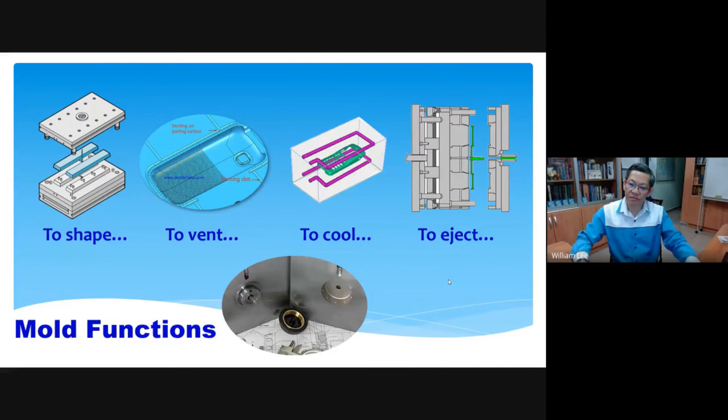So this involves whether the mold can function or not, which requires the study of mold design. In terms of mold reliability, how long can a mold last depends on what type of mold material you use - whether your mold is made from steel, beryllium copper, copper alloy, or aluminum alloy.

It also depends on how you fabricate the mold, because some machining work can damage the mold's metallurgical properties. If you choose steel, you need to make sure it has been properly hardened - hardening brings out the internal qualities of the mold to enhance its performance. And you need good maintenance as well.

How do you stress the mold? Stressing level depends on the design of the mold - if you have a stress riser or high stress point, that can shorten the mold life. It also depends on the setup - if you have misalignment, that's also no good for the mold to last longer.

It also depends on the material - some materials may have glass fiber added, giving a high abrasion rate, so the mold will wear off faster.

It also depends on the machine - whether you're using a machine that isn't rigid, for example, how stable the machine is, leveling issues for example, and the service condition - how you run your mold. If you run it abruptly or use it abusively, that can only shorten the mold life. So this covers the mold reliability issue.

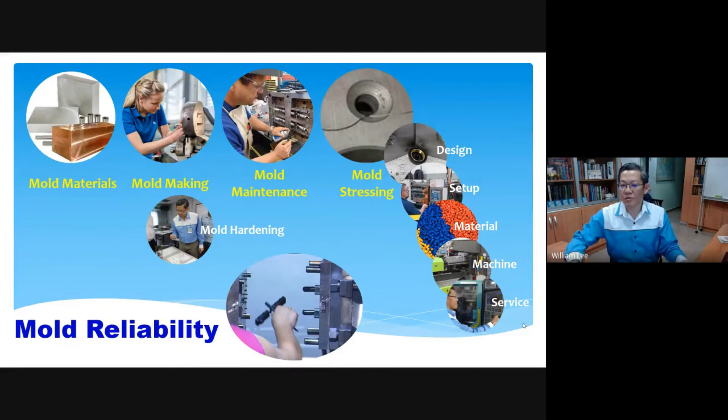I'll skip some of the earlier slides here, just to cut it short, because I'm running out of time now.

In terms of machine selection, this is another M. Usually when you select the machine and mold, you must know their capability and the limit of the machine. A lot of people select the machine based on clamping tonnage - this is the clamping system. Obviously you need enough clamping force, but clamping is only one of the selection conditions.

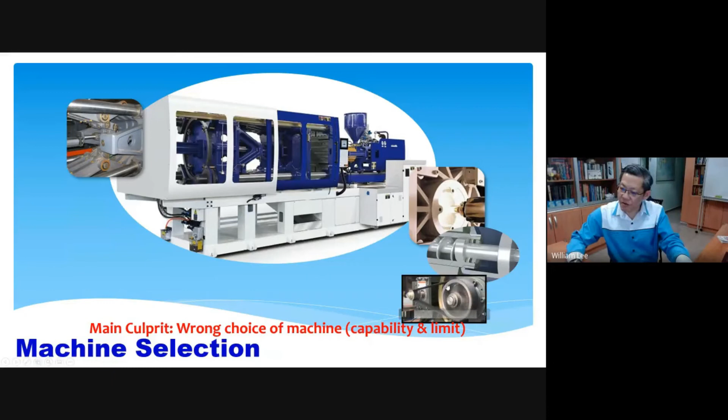Other conditions you need to consider are the machine's shot weight, and also the power source - whether it's from a hydraulic system or an electric machine driven by a servo motor.

And also your machine platen, the parallelism of the machine platen, which is important. And also some of the control systems in your molding machine, whether they have a built-in sensor to measure some of the output data. And also the mold system involves the cooling system, the hopper drying system, right? So study of the machine specification is important, right?

So when you purchase a machine, usually the machine supplier will give you the full list of the machine specification, involving the clamping tonnage, the power ratings, the shot weight, the control system, dryer system, and also the cooling system.

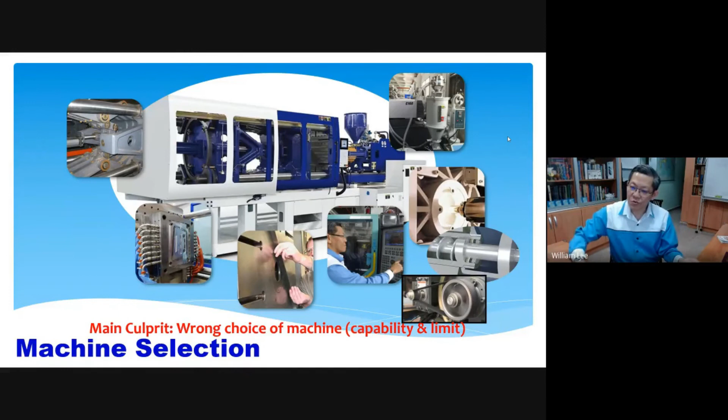Okay, so when it comes to the processing method, I found out that inappropriate steps and processing parameters are the main culprit from this M factor here, from this method here. So you know that your plastic is actually not truly like a liquid, they are very thick and quite sticky, right? And this will cause the material which is not flowing easily.

So the viscosity of the plastic depends on many variables. It depends on the temperature, the pressure that you set, the speed you use, the time, and also whether you have a distance, the room distance for them to move around. So when it comes to workshop practice, you actually need to control the temperature, the pressure, the speed, the time, and the distance control.

Distance, for example, a short distance. And a shot volume, where they move up to a certain way for the screw that allows you to inject sufficient material or not. And these are the 5 weapons for the molder to control. And that depends on the method that you use.

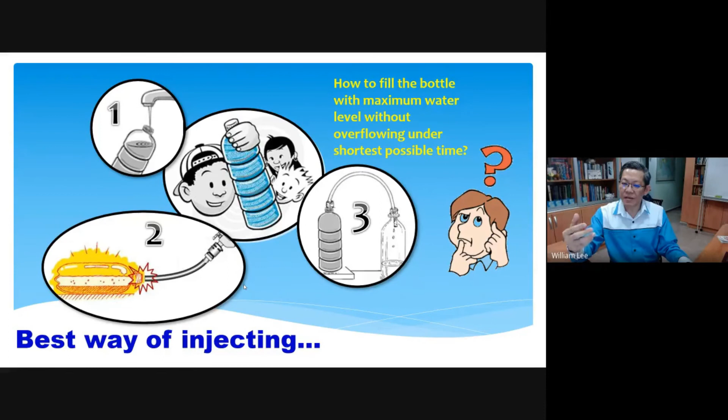So therefore, we need to develop a process. We call this a strategic process. And since I mentioned that manufacturing is a science, we need to develop a strategic process called scientific injection molding. And because you have so many parameters, remember you have temperature, pressure setting, time setting, speed setting, and also the distance setting. Too many variables. You must develop a traceable, standard process, right? So you try to segregate all this data, but you need to have a process development, right?

So, and this strategy, we call it scientific injection molding. So therefore, to learn about this scientific injection molding, you need to study the background of this process, to study the ins and outs of this 5M that I mentioned, in order to ensure consistency.

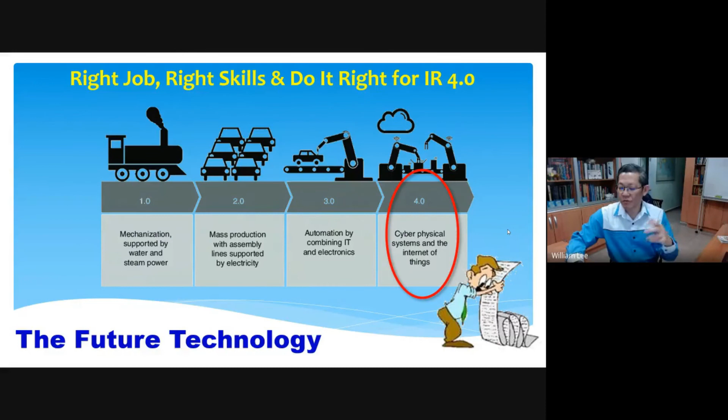So in the future, people say there are going to be a lot of challenges, especially with the coming of IR 4.0. And some people worry about whether our jobs will be replaced. IR 4.0, the ultimate aim is to have autonomous running of the machine, whether we will be replaced by the robot. But don't worry, robot will never replace human skill. If you have some of these skills, let's say these are the knowledge and skills that the robot may not be able to replace.

So the 5M study involves the design, making sure the design is moldable, the study of the material, study of the mold tools, study of the machine, study of the method.

I break down here this method - there can be many methods to make the parts, and many materials used in manufacturing. If you talk about injection molding, of course we involve plastic. For the mold, you use steel, so you have to study ferrous material. If you use aluminum alloy or copper, then you involve non-ferrous material.

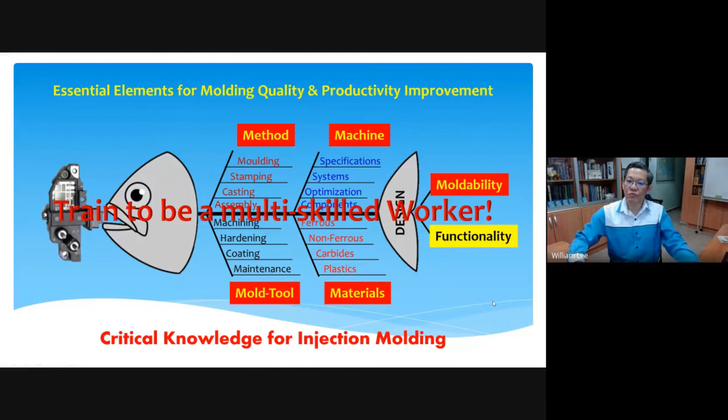These are critical skills and knowledge to secure your employment, and to help improve quality and productivity in the molding process. I want you to be trained as multi-skilled workers nowadays. Single discipline is not effective anymore to troubleshoot problems effectively. This is the reason why the MBOT define engineer is a single discipline, based on a profession with an academic

engineering discipline degree, whereas the technologist is a multidisciplinary technology. If you can acquire all this 5M knowledge, you are no longer narrow to only one specific task or skill. With this 5M knowledge, you can also fill up some of the vacancies in various technical departments. Remember, overall manufacturing quality and productivity does not depend on a single factor - it depends on all these 5M. They must be brought together to achieve the final quality and productivity.

Also remember, technical solutions are not always one-sided. You need to optimize. You have temperature control, pressure, speed, time, distance, and even material hardness. You can see you cannot be too low, you cannot be too high - you need to optimize. So how do you optimize?

For example, if the temperature is too low, you cannot melt down the plastic, you cannot flow it. If the temperature is too high, you may overheat the plastic and destroy the molecular chains, which is no good for the product. So you need to control it - you need to narrow down and find the best optimized range to build a robust working window for your process.

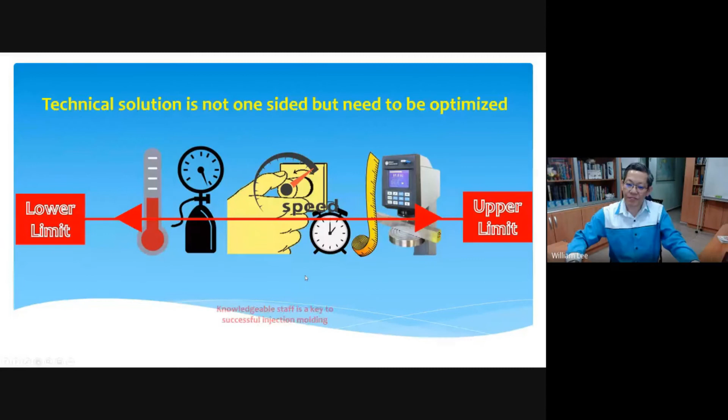Based on my experience, I have invented this so-called manufacturing insight skill training to address the 5M study. I find this is really a missing link study to develop knowledgeable workers and to promote scientific manufacturing. If you're interested, you can log on to this link. Later on you can ask your lecturer, the MC, the moderator Mr. Lim - he will give you this link if you want, so you can log into it to attend other courses if you're interested.

Okay, the final question, the final quiz. Can Lim type this in - this is the final quiz. Which element is not included under the 5M concept learning? Okay, so this is quiz number 5.